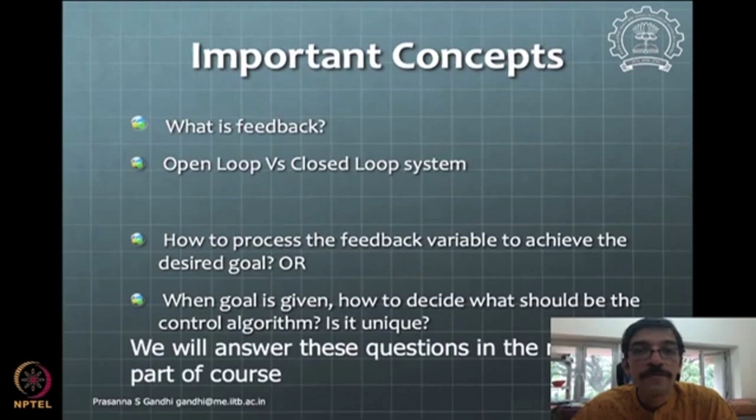As we go along, we'll slowly start unfolding answers to these kinds of questions. Now let's take an example, but before that, we need to be sure about given a plant, what are the inputs and outputs. You should be very sure about this is my input or this is my output. Based on input and output, the kind of development of control and its properties may have a lot of changes that happen. And then we establish the relationship between input and output, which is what mathematical modeling gives you.

Once we have that relationship and we know the inputs and outputs, we are more or less ready to delve into the development of control algorithms. There are several representations possible for a system, but right now we are going to look mainly at the ordinary differential equation representation, which is the most fundamental form. The state space and transfer function representations are valid only for the linear systems case. For nonlinear systems, you may have a state representation that we'll consider later for control development in a different way. But ordinary differential equations are the most fundamental form of representation one can use for analysis, or to propose any control and then do the analysis or synthesize the control based on the equations.

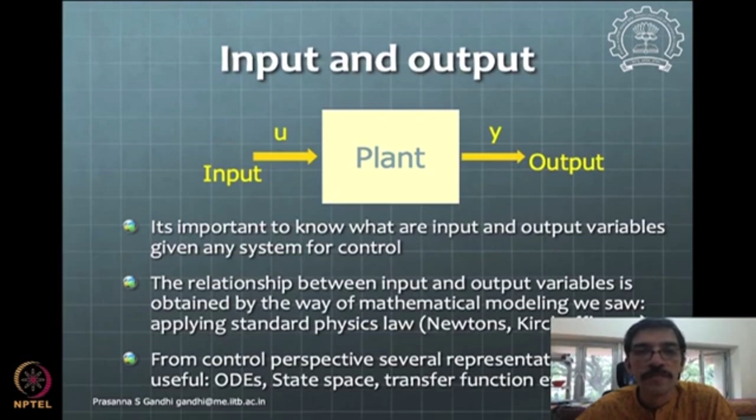How do we do that? We'll see soon. So let's take this example of a block lying on a surface, our standard example: this block with mass m on the horizontal surface, currently at this position, and now this force F is applied on the block.

Okay, so let's assume for now that there is no friction between the block and the surface, and under such a scenario we want to drive this block to the desired position shown.

What is the quantity of interest here? It's x, the desired position. So position is our quantity of interest, which is the output. And the quantity you can dictate, the input to the system, is force F. F can be any value that we want to apply.

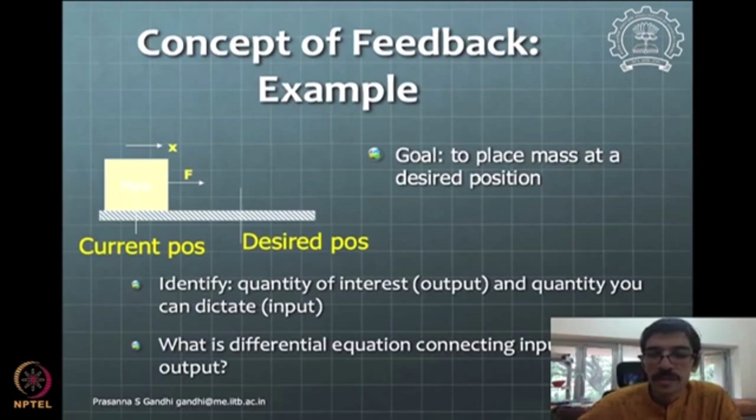Of course, when we talk of a mechatronic system, F will have some certain saturation limit, but right now for theoretical discussion we consider that whatever value of F is desired, you are able to apply. So F is something we want to dictate such that we reach the final desired position. First we see the relationship between input and output, which is F equals m x double dot.

Now under such a relationship, if we want to pose this question: to take the mass to the desired position xd, what should be the applied F? There are many solutions to this problem.

One simple way, if you remember, we had done some kind of planning for the trajectory. If you recall the trapezoidal plan for the trajectory: I'll start moving the block along a trapezoidal trajectory, such that the final point of the trajectory takes me to this desired position.

So if we plan such a trajectory, we get x desired dot first, and then if you differentiate that you get x desired double dot. If you see along the trapezoidal trajectory, these are just a pulse of acceleration.

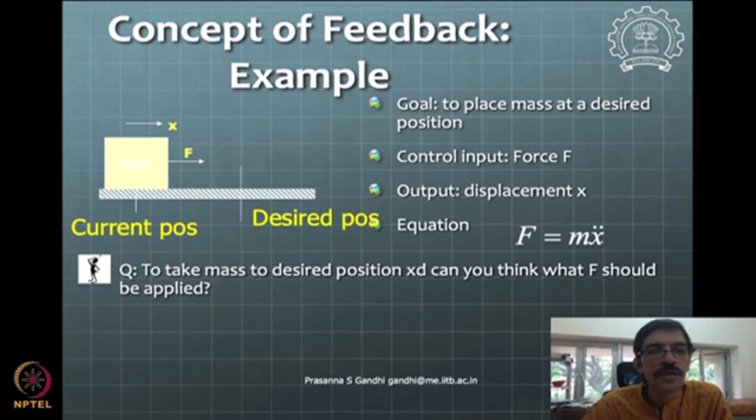So for the trapezoidal trajectory velocity, if you take a derivative of this, initially the velocity derivative will be positive, a positive slope of the trapezoid, and then for some time duration you apply zero x double dot, and then you apply x double dot which is reversed.

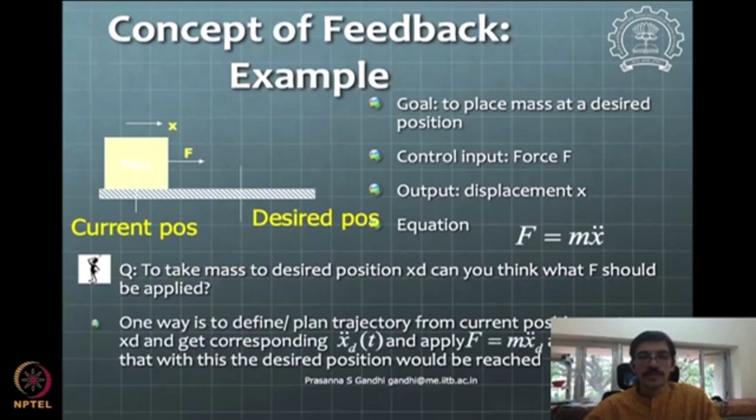That's how the trapezoidal trajectory defines the desired acceleration. Now if we know this desired acceleration xd double dot, it will be in terms of these two pulses coming: one for the beginning of the trapezoidal trajectory, which is a positive x double dot, and then at the end a negative x double dot. These pulses are to be applied as F, scaled by mass m, and if we apply these pulses, we hope that the desired position would be reached.

So this is one of many kinds of trajectories of F that can take you to the final desired position. This particular way of doing things, where you are really not using any information about where I am at the moment along the track—there is no dependence of F at all on x, it's directly a function of x desired, and x desired is what I have planned.

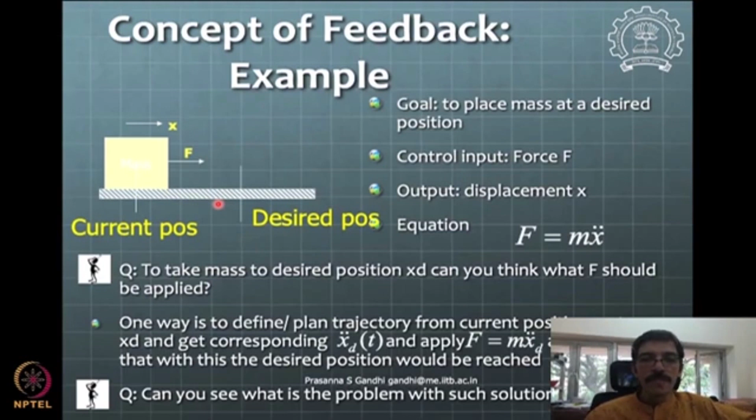Now the question comes: look here, I've mentioned the same thing, no feedback. So we have not used the feedback of our input-output variable x here. We would not know if we have really achieved the task. We have given this input trajectory and forgotten about it, and then if we look, we find we are not at a desired position. So we are not really looking at whether we have achieved the final goal or not in real time.

So we need some sense of current position, and make use of the same to develop this f to be applied. So mathematically this question can be posed.

Say for example, if you are given this kind of a scenario with your eyes open, and you are saying, okay, I want to apply force, whatever you want, to this block or your mobile, to take it from one position to other position. What would you think of doing? See what force you will apply. You will see, okay, I have applied some force, the mass has moved, and I keep on monitoring: has it reached the final position, has it reached the final position?

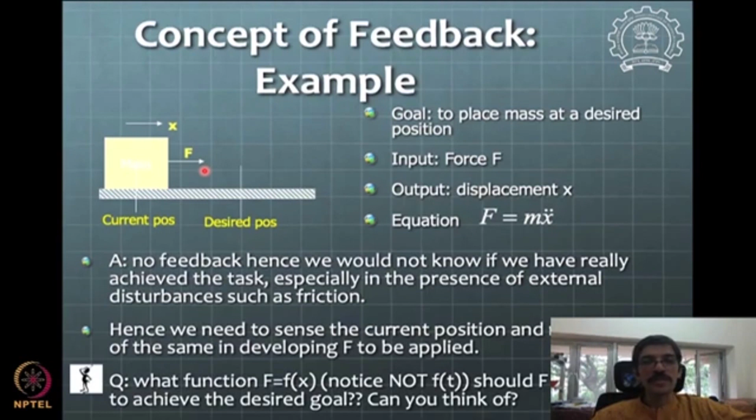So the question is, how do we convert whatever knowledge we develop as a commonsensical thing into some kind of a mathematical form? So the question is, what is a function f, some function of x, such that - this is not a function of time explicitly, it is an implicit function of time through x - what kind of function of x should f be, such that we achieve the desired goal?

So pause here and propose some function, and then we will try to see what we can do with that kind of a function. This function should be involving x in some way.

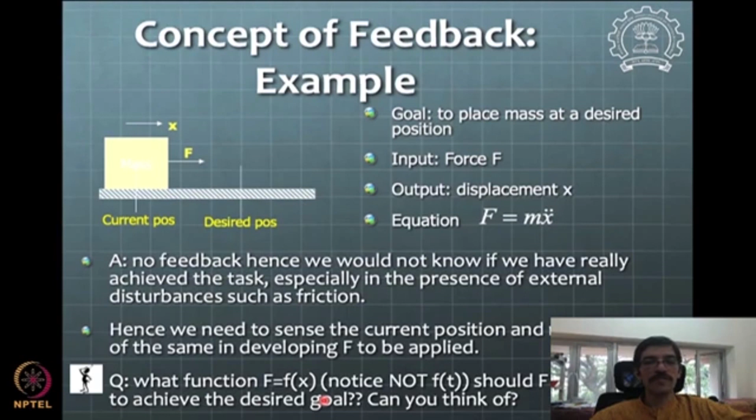So the simplest kind of solution one can come up with: make sure, as I said, the error between current x and xd, and make f to be some function of this error. So we want f to be 0 when error is 0. Once you go to the final position, we don't want to apply any force. You will agree with me on that, right? You don't want to apply any force once I'm at the final position.

But now if I just do this - apply f proportional to this error, the error between current position and final desired position - then what would happen? Think about that.

Will I really reach the desired position, and then f will be 0 there? Although f is 0, will I stay there forever? Those are the kind of questions we need to ponder over.

That's one way of thinking. Another way is to see, if I put in some kind of virtual system of springs and dampers such that the equilibrium position for such a spring and damper is my final desired position. This is another kind of philosophical or conceptual thinking one can do.

You say, okay, if I put some kind of damper — this is a more physical way of looking at things — that I throw in some springs and dampers in a virtual way. They are not there in a practical system, but I am thinking of putting them as virtual elements in the system which will finally drive my system to my desired goal.

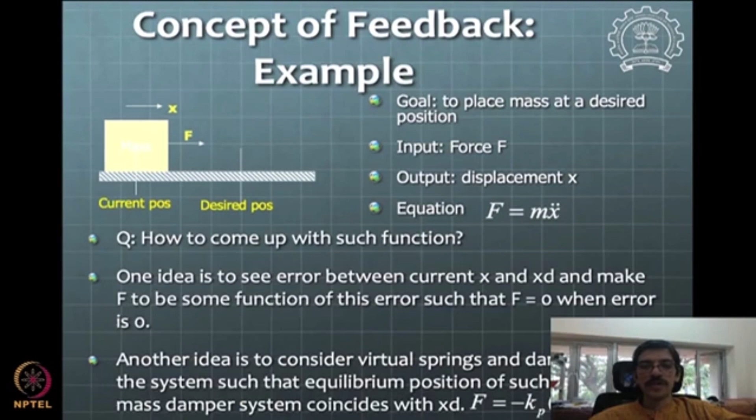Let's propose this: the f proposed here is some kind of error multiplied by some proportionality constant, which you may be familiar with as a proportional kind of control action. So kp times e is giving you the final form of f proposed. Now how do you validate that this will work or not?

If you put this expression into the equation of dynamics, that is going to give us what is going to happen. So I put this f into the equation of dynamics, and we find the equations which govern the error dynamics. This is a very important step — to find the equation governing the error dynamics once you propose some function for f.

Some function for the control input, if it is given, then what is the final error equation that you'll get is very important to arrive at this equation.

Now by observing this equation, we can see this is a harmonic system. There is no damping in this system. So if the initial error is E0, the final error will keep on oscillating between the values E0 and minus E0.

So the error will oscillate, meaning your mass is going to kind of oscillate around this desired position continuously. Can you see that with this equation, that this is happening?

Once I apply this kind of force, although the force gets to zero at the desired position, the inertia built into the system is such that it keeps pushing my system — the velocity is not yet zero there, so the system gets pushed to the other side, and again it comes back, and again it goes back, on the other side it comes back — like that it keeps oscillating around the desired position. So how do you take care of this?

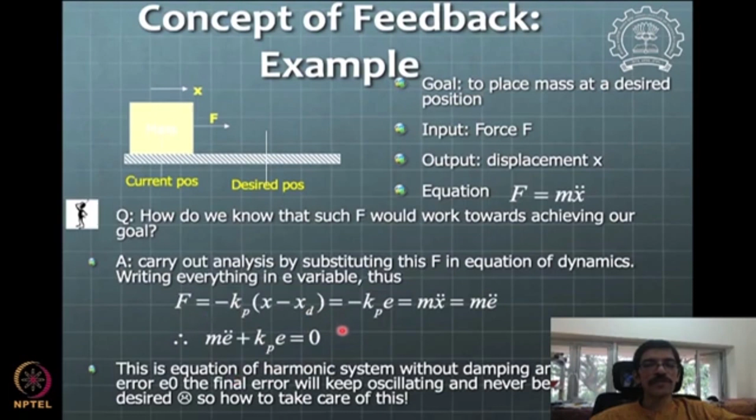We need some kind of additional element which is a damping here, so we put that additional element into this desired form. So this is the desired form I would like to have.

Then if I would like to have this kind of desired form, what is the control input which will give me this form — what is my f which will eventually give me this form? This is how one has to think, in the space of ordinary differential equations, to analyze systems.

I am taking this very simple example just to get a concept across. This can be extended to whatever complicated dynamics you are looking at.

This is a pure kind of differential equation kind of analysis. So even if you don't know what zeros, poles, or any concepts are, you can just do this kind of simple analysis to get to the answer. In the presence of friction and other nonlinearities, this analysis gives much nicer insights into what is going to happen than your Laplace transform or other linear forms of analysis.

We can use those forms also, it's not that we have to use this instead. What I'm saying is we should be aware that whenever those forms fail or are unable to give enough information, especially in the presence of nonlinearities, we need to have some backup tools available to carry out this analysis.

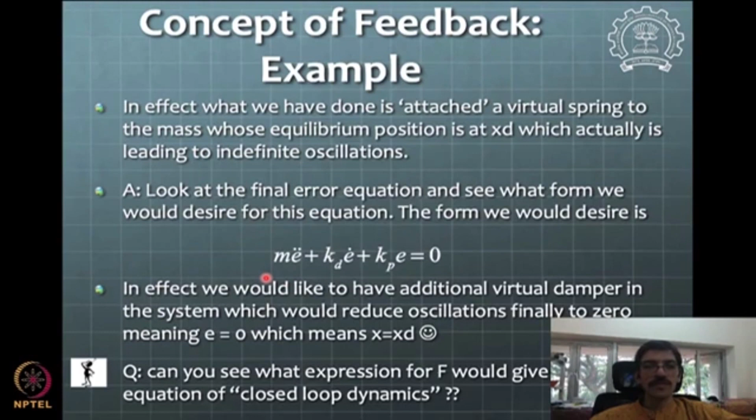So this is the main concept now. Next, I'll pose some problems here for you to think about and do some analysis, and if you have any doubts or questions about that, we'll take those up.

So you can look at this, this is a PD kind of control feedback. The beauty is that once you have this error dynamics known, you can play around with these parameters, kd and kp, to see that the error response is controlled in a way you desire, and that helps you tune kp and kd to get whatever desired response.

So there are other tools available. One can use those tools directly, or one can come to this approach, depending upon whatever is easier or applicable. That's how one can look at this.

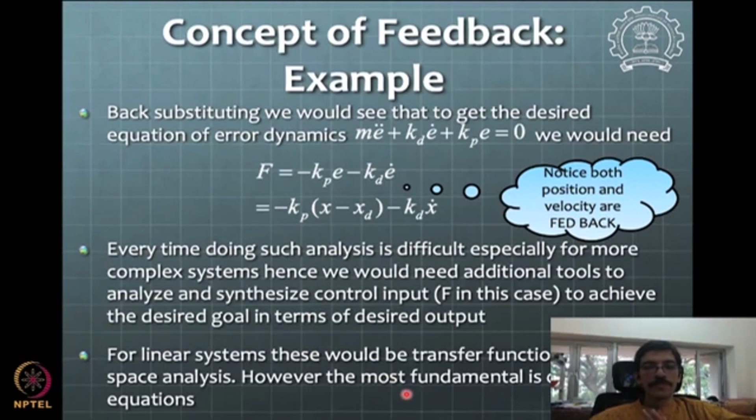Okay, so now let's see this other problem. This is the same problem but now for rotary kind of dynamics. You have the motor, exactly like before, but now a disc is added on top, and we have the encoder at the back which gives feedback theta. Our quantity of interest is to place this disc at a desired angle, theta, and the quantity we can dictate is the input torque.

You may want to take voltage as input as well, especially when you know the motor model and you're actually applying PWM duty, which is the average voltage given to the motor from 0 to 100%. That voltage given to your motor can be considered as input, and when you consider this as input, you can take the motor dynamics into account and get your entire model ready.

This model without friction and without motor dynamics will be similar to the previous set of equations, but now I'd like you to add, as your homework, the motor model to these without considering inductance in the motor, so that the order of equations remains the same, and you can get how this voltage and theta relationship comes up.

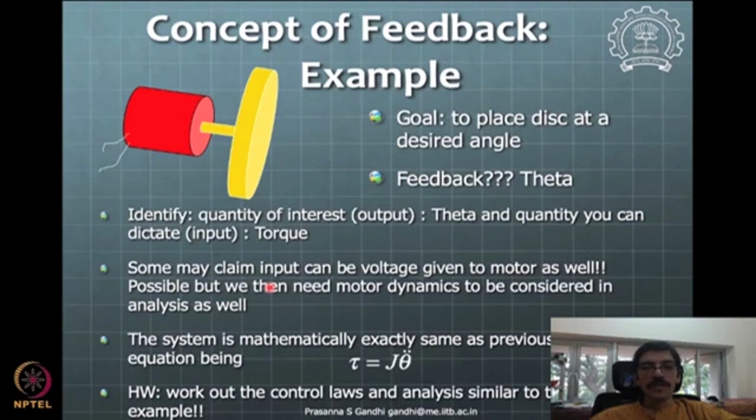Now practically when you start doing that, you'll find that there is additionally friction in the system. So now the question is, how do you analyze whether, in the presence of friction, my proposed PD control feedback will work or not? That's where the tools of error dynamics analysis, which we saw for the basic concept of feedback and fundamental ODE analysis equations, will come in handy.

Okay, so I suggest that you incorporate some simple model of friction, say to begin with, some simple Coulomb friction model you can put into your equations. We have seen all the models of friction. So if you put just a Coulomb friction model, what would be the result of that? In the presence of friction, can you work out whether my final error will be really zero or not?

Okay, you'll find that there will be some kind of a steady state error. You'll not be able to compensate. So that steady state error will be there in the presence of PD control, and that steady state error value will be some function of your gain and friction value. Okay, so find out what that function is.

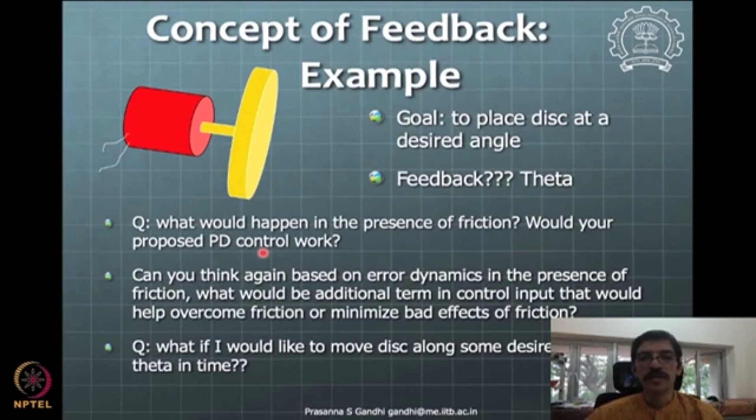So think about that, and slowly we'll build upon these concepts. And then there is another problem that one can think about. See, now the goal is different. The goal is to rotate the disk with the desired speed. Okay, for this, now what will be your feedback?

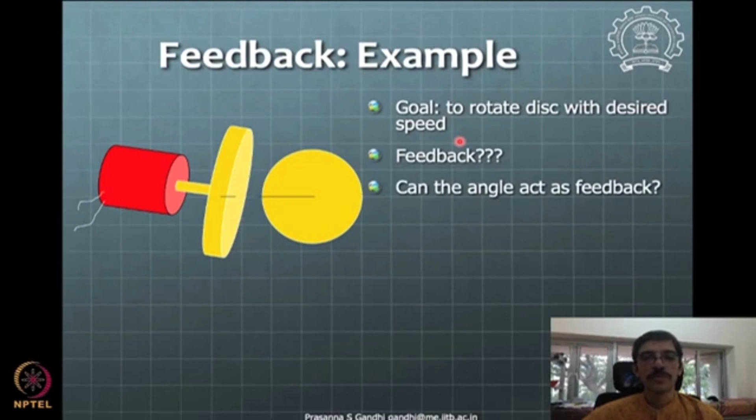What's going to be your model of the motor? If you use angle as a feedback, will that help for this? These are the questions you need to think about, ponder over, and come up with some kind of design for such a system. So this is another different problem. Okay, so our control input is the same, say voltage, and desired output now is speed.

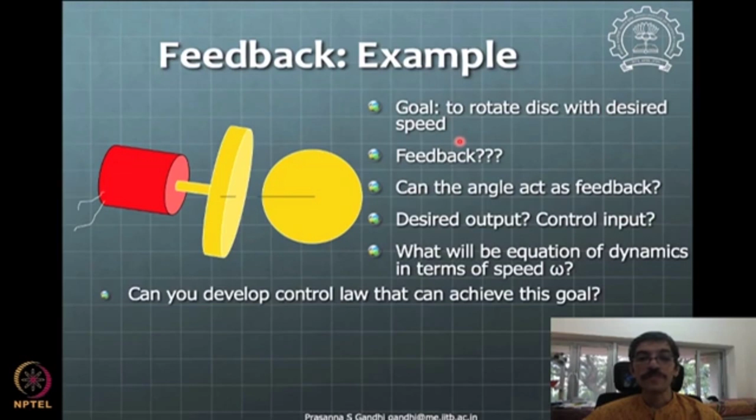So then what is now this new variable which is the desired output? What will be the equation which is governing the dynamics? So this dynamics now is in terms of omega, not really in terms of theta. So the order of equations will reduce by one. Okay, so now with that, can you develop a control law which will achieve this goal?

Can you propose some law and do the analysis, the error analysis? Now you can think over whether you will require that KD term in this case. So one can see that this system in terms of omega is going to be a first order system instead of a second order system, and then there will be no overshoot for such a system.

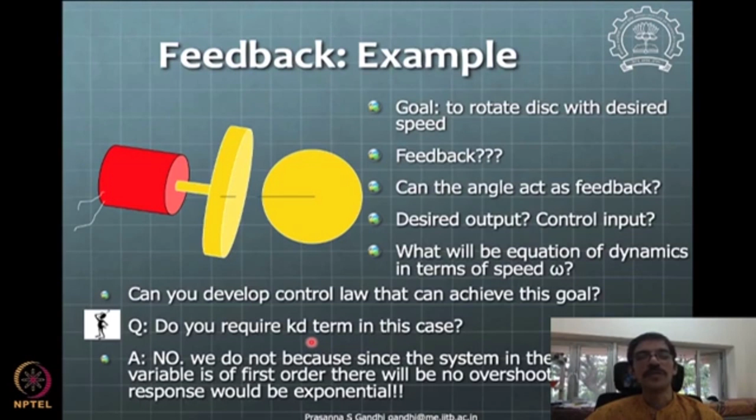If there is no overshoot, then probably this damping may not be required. Typically you require damping to avoid the overshoot that was happening in the previous case. So like that one can start thinking about doing things and getting to a control which will take us to this final desired speed. And now I want that to happen in the presence of friction as well.

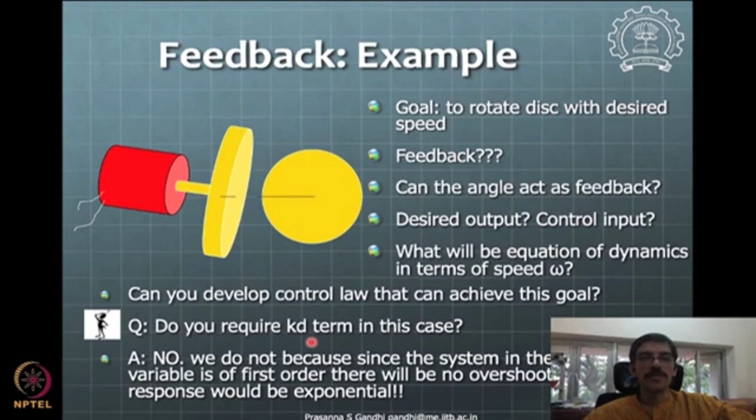So what should I do? Those are kind of questions that one can ponder over, or think about and come to some kind of control expression which will take you to your desired goal. Okay, and you prove that with the error analysis you are indeed going to the final position in the way that you have planned. Okay, so like that you can consider now these different other systems.

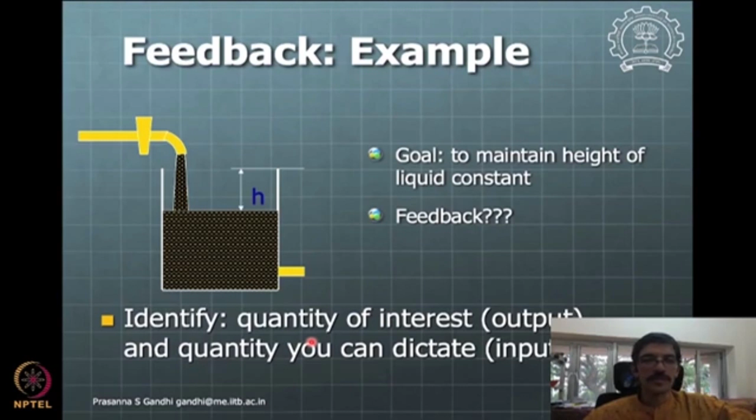Okay, a couple of one or two examples, and you'll form up this concept in your head. Okay, so I think maybe we'll stop here.